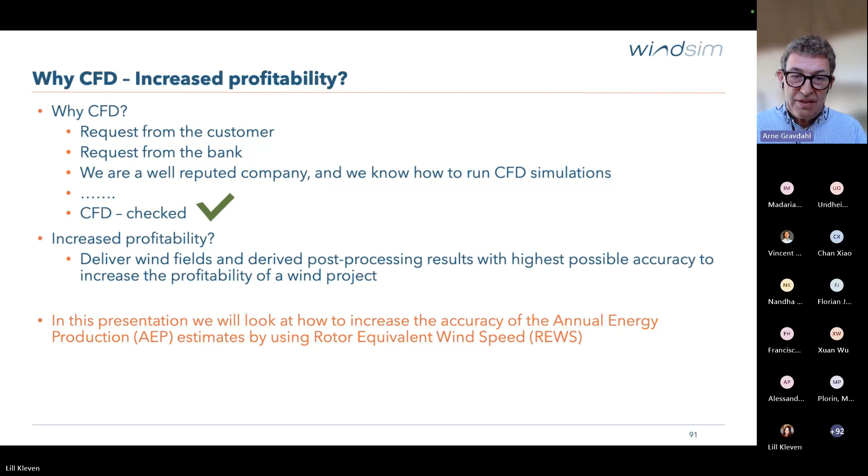But what we would like to do and what we would like to see is that by delivering this, you actually increase the profitability of your wind projects. So that's the purpose of this talk: to see how you can do more proper post-processing to create this increased accuracy, not only stopping at the CFD flow simulation itself. In this presentation, we look at how to increase the accuracy of the AEP through using rotor equivalent wind speeds.

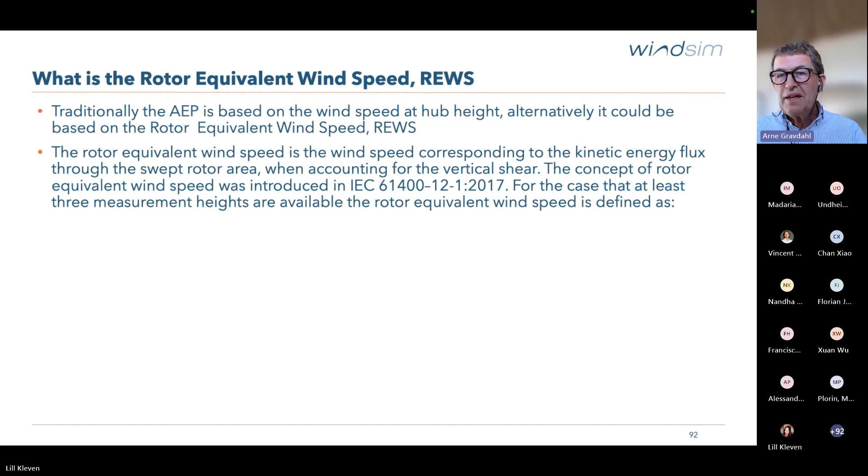So what is a rotor equivalent wind speed? It's much easier to explain with an illustration. You know that when we calculate the annual energy production, it's based on the mean wind speed at hub height. But some years ago, back in 2017, a procedure was introduced in the standard where you could divide the rotor into slots, calculate an average wind speed in each of these slots, and combine it based on the area of that slot. So here is the definition.

By doing this, we take into account the effect of complex terrain, or a terrain where you have a forest, or high stability - basically areas where the profile doesn't really match what you see at the test site where the power curve was established, a flat area. So this is a potential improvement on our annual energy estimates.

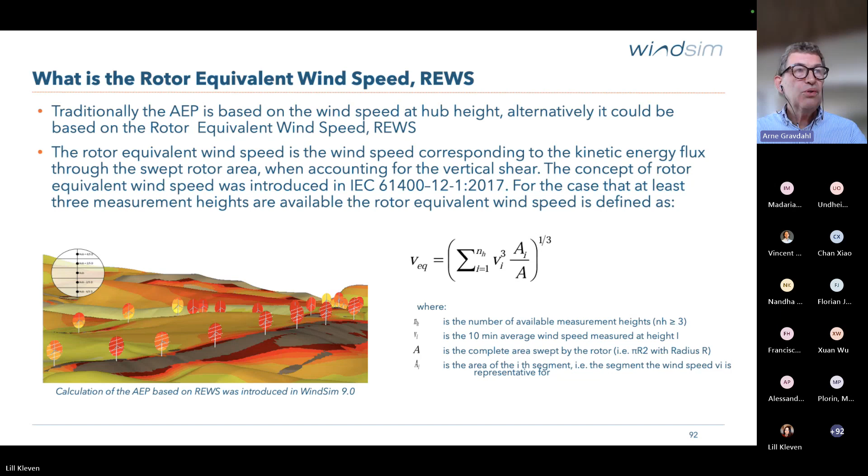How did it start? I attended a tech workshop in the US many years ago, and at that time DNV published a white paper on what is the status today - how good are we at establishing the annual energy production, the pre-construction estimates. They compared many sites with actual production data, and the outcome was not that good. We actually saw an overestimation of the estimated production by almost 10%. This was a great dilemma for the industry.

So of course the whole industry looked at their procedures, and we were aware that there were many areas where we made too optimistic estimates - the measurement campaign, the long-term correlation, the flow modeling, the wake modeling - maybe we were a bit too optimistic. So DNV made better models, more conservative estimates. At least they have an updated version of this white paper, and today they claim that they have very little errors - only a few percent.

If you look at this updated presentation, you'll see the spread—the times you do underestimation and overestimation—is still there, which to me indicates that maybe we only do more conservative estimates, but we haven't really improved too much on our modeling.

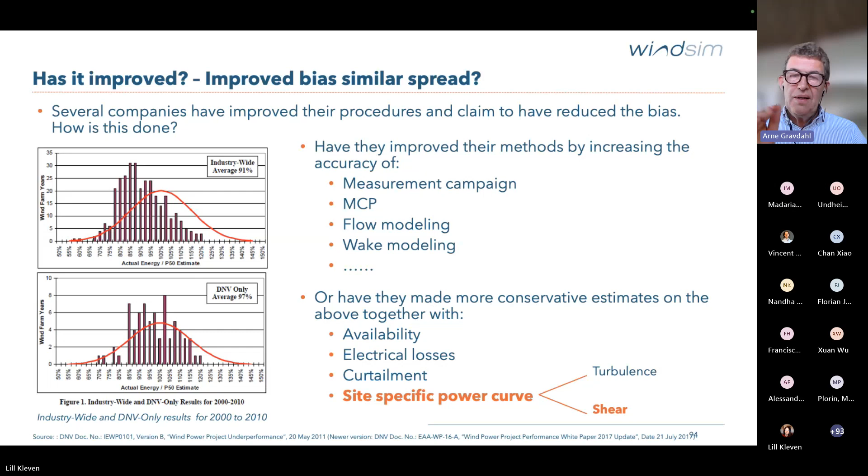One of the main reasons people thought at the time for these too-optimistic estimates was what they called the site-specific power curve. We needed site-specific power curves because if a site has a lot of turbulence, you cannot expect the same production, even though the profile is the same, compared to a site with lower turbulence.

Some turbine manufacturers started giving out power curves for different turbulence levels. We won't look at that, but we will look at sites where we have different shear. This is how it was handled many years ago, and years later it ended up in the standard, allowing you to do the so-called rotor equivalent wind speed.

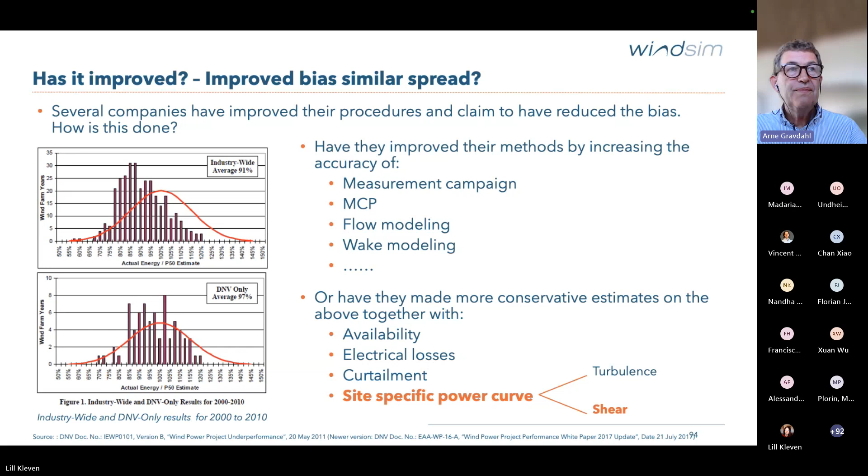We learned about this from a contributor, Francesco Castellani, a professor in Italy. He has attended many user meetings. Unfortunately he's not joining us today, but he showcased this many years ago.

He had sites nearby where he is located, at complex sites, and he observed that there are no log profiles—there are other profiles, including negative shear profiles. So how does it come that they produce the same output? He created an article back in 2005 showcasing that this is actually a big problem.

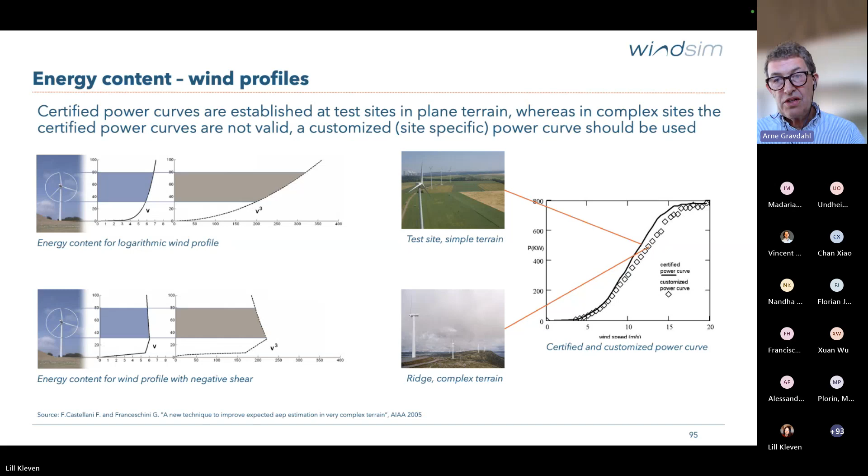To illustrate: you have a power curve obtained at a test site, a flat area in Denmark or Germany, but then on another site where there isn't a log profile, the turbine doesn't follow the power curve established at the test site. So we'll try to deal with that.

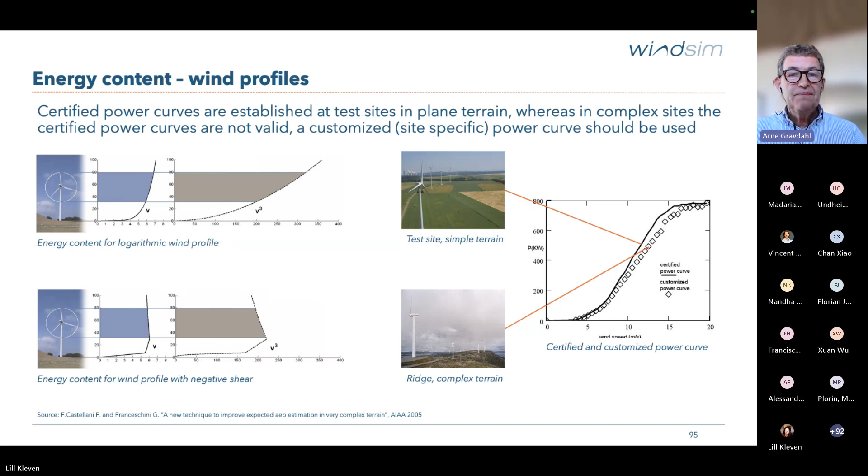When I deal with a problem like this, I like to make a simple model to highlight what is happening, so I make a cosine hill. Here are the dimensions of the model, and also the inclination—it's a rather steep hill, so there will be recirculation.

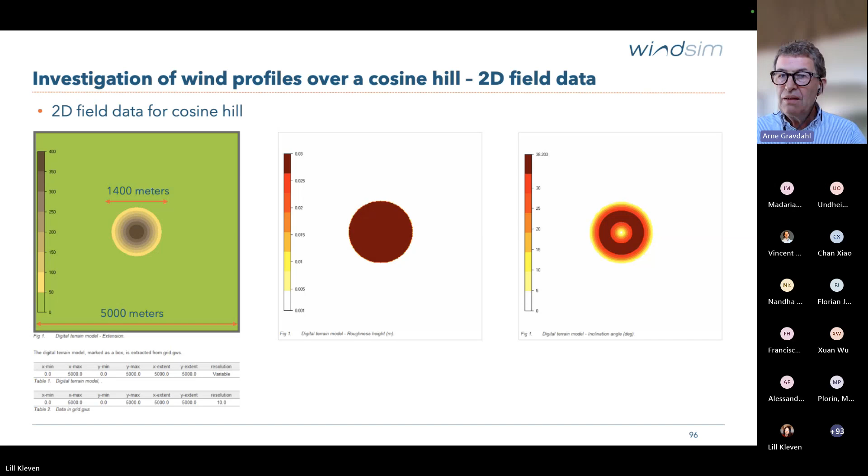This is the numerical model: 1 million cells, down to a 10-meter resolution in the refinement area.

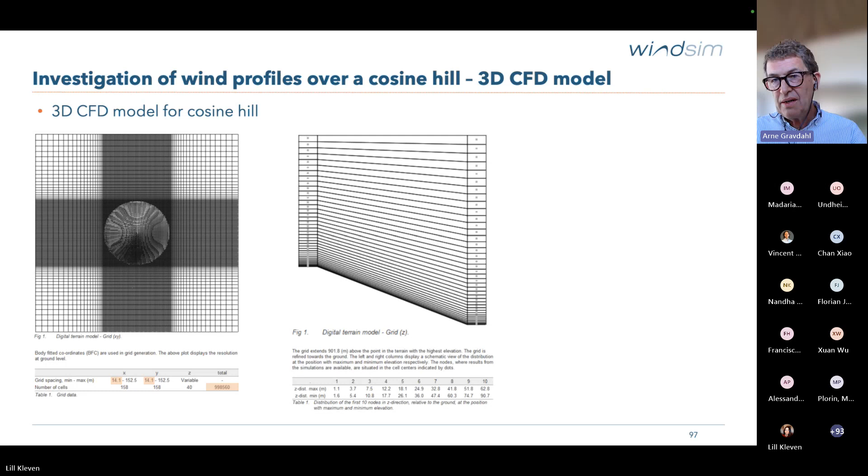I don't bother running all wind directions since this is a symmetric case. I run one wind direction, from 180 degrees, until it converges—it doesn't take long, about 15 minutes. All the other directions I don't care about; I just run them so I can create a report with energy estimates at the end of the WindSim procedure.

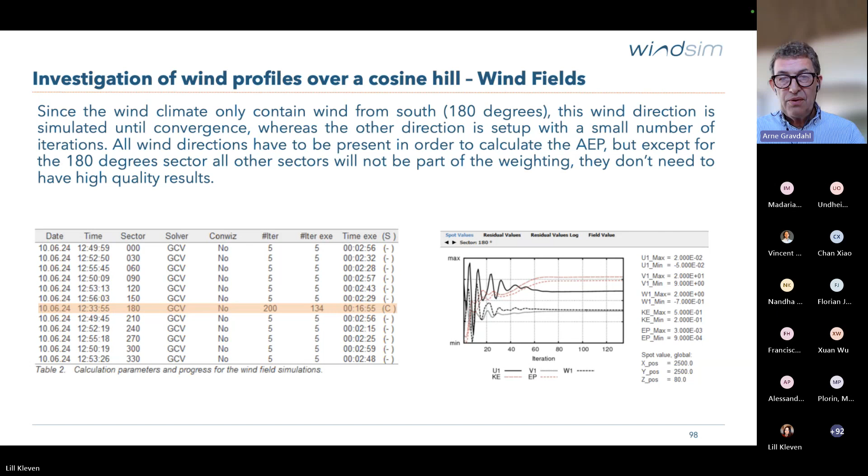On the lee side, if there's recirculation, it's a bit extreme—some turbines are located in the recirculation zone, so I skip those as part of the AEP estimates. The speed would be that low, essentially zero velocity, but it's not realistic to look at production in a recirculation zone.

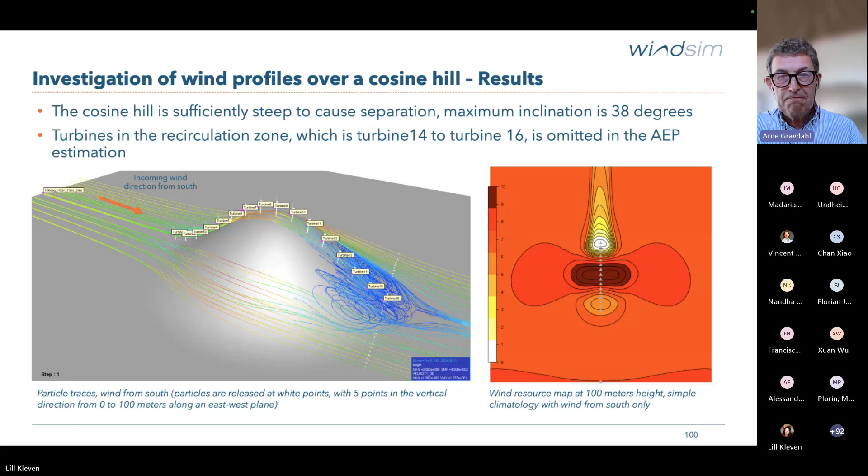Sorry, not the production yet. I've also showcased and highlighted the profiles for some of the turbines. Turbine will show a log-like profile. One more back.

The first turbine, number 1, is in the upper left corner and shows a log profile. Then I take turbine number 4, where the shear changes all the way towards the top. Then I have turbine number 9, which is on the hilltop, where I have a negative shear.

And then I go towards turbine number 13, which is just before the recirculation. It's slightly inside the recirculation, it looks like, and it has an extreme shear.

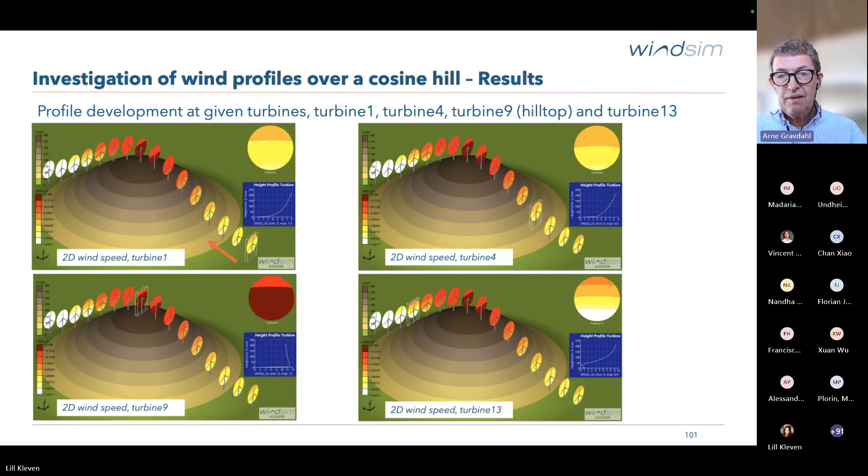In the next slide, we will see all the profiles for the turbines. Turbine number 1 is at the upstream, and then it's 100 meters in between each of those. You see how the profile changes until on the lee side it recirculates.

Remark that here we look at the 2D speed, so it will always give a positive value. So you have a kind of an inflection point towards the last number of turbines. It should have been negative values, but since we look at 2D speed and the absolute value, it doesn't show the recirculation. But you can see this inflection point where the recirculation happens, so it is turbine 16, 15, 14, and slightly 13, which is within the recirculation zone.

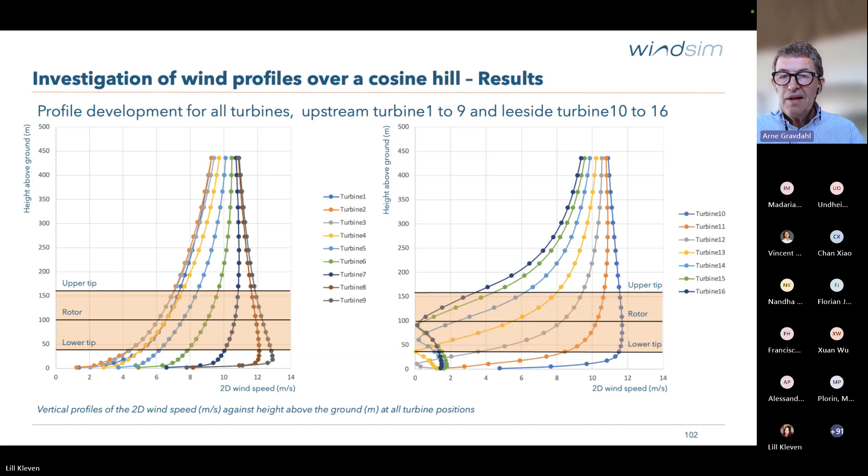Okay, then we will look at the annual energy production. So in the first, I simply create two layouts. One layout, where I specify that I would like to run normally with energy estimated by the speed at hub height. And then I create another layout, where I turn on the rotor equivalent wind speed calculation.

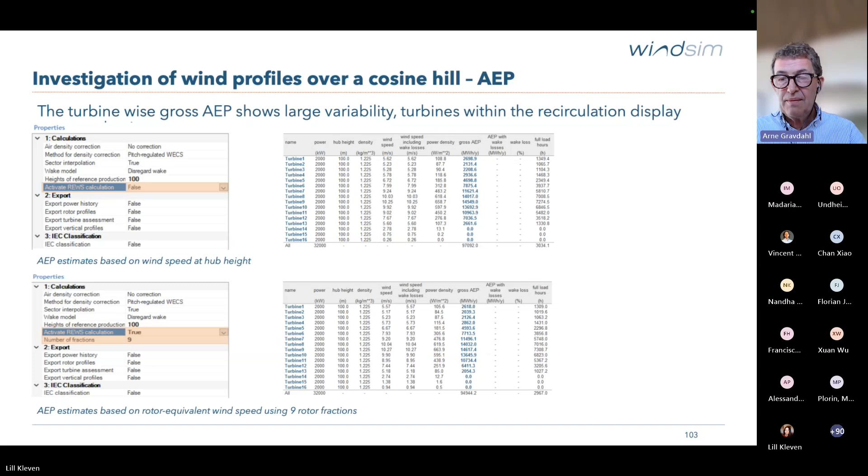So if we go to the next slide, the orange line here is the energy estimate turbine by turbine when you use the hub height. The blue one is the annual energy estimate when you use the rotor equivalent wind speed. What we can observe is that they are quite similar—actually there's a difference of minus 2%. You will get a lower estimate if you use the rotor equivalent wind speed.

Also remark the large variability. The lowest production is at the turbine that is upstream, when the wind slows down before it accelerates over the cosine hill. There's a variation of nearly a factor of 7—6.8 is the difference between the lowest and highest production. Now I disregard the turbines in the recirculation, so they will not be producing in a situation like this. Turbine 14, 15, and 16 don't produce at all because the wind speed is too low at that location.

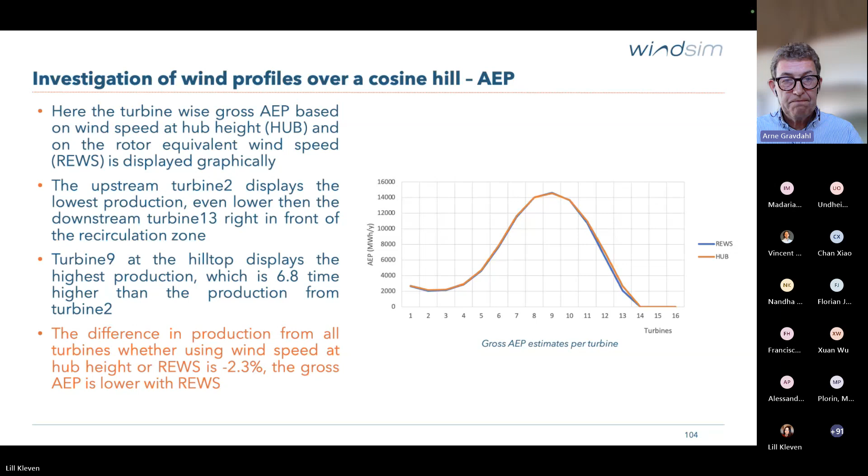So this is the kind of big picture. But if we look at it turbine by turbine, there is a variation for the upstream turbines as the shear gets first higher and higher, and then turns into negative shear. With the highest shears, you have a discrepancy of -2 to 4.5% for the turbines upstream. The turbines at the hilltop will actually have a positive contribution—they'll have a higher AEP when you use the rotor equivalent wind speed. They are the ones with the negative shear.

And then it gets quite extreme towards the lee side, with very high shears there before it separates and you see the recirculation. Then you have a -9.8% difference, and even almost 30% difference, whether you run it with hub height or rotor equivalent wind speed.

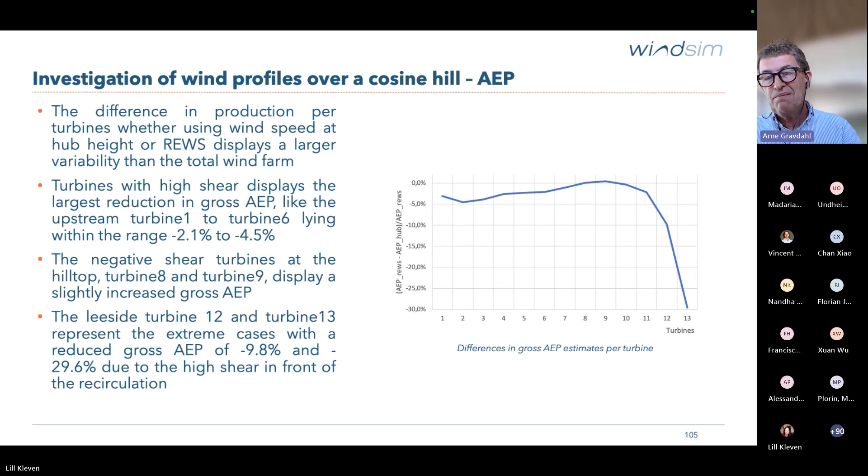Okay, I think there is maybe one or two more. Here is the summary: we have shown that we will hopefully increase the accuracy by using this rotor equivalent wind speed. For my artificial wind farm over the cosine hill, I had a change in production by 2%, a bit more. And the turbines that are the most extreme, with high shear, will show even higher discrepancies between hub height wind speed and rotor equivalent wind speed.

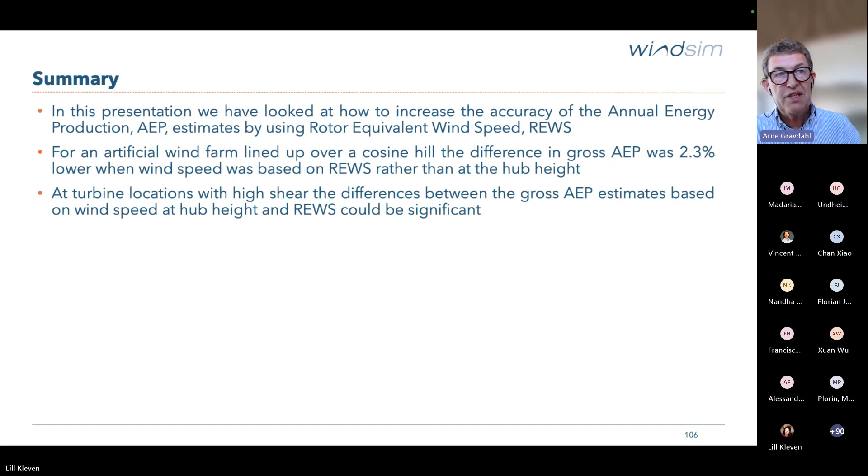Yeah, I think that's what I have on that topic. I guess we'll take some questions afterwards.

The next one is even shorter. It's on time series versus frequency distributions. This is a topic we have showcased in our training sessions for many years, but every now and then, when I discuss with people almost every day, I'm a bit surprised that even really experienced wind analysts are not fully aware of this dilemma.

That we should use time series when we do our post-processing and not frequency distribution. So I've brought up some of the slides, renewed a bit from the training session, and I'd like to highlight this fact here. So if you take me to the next slide, Lill.

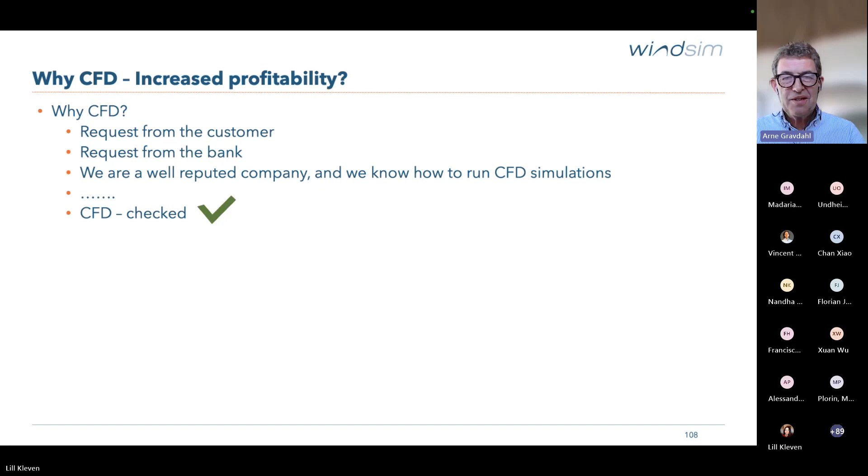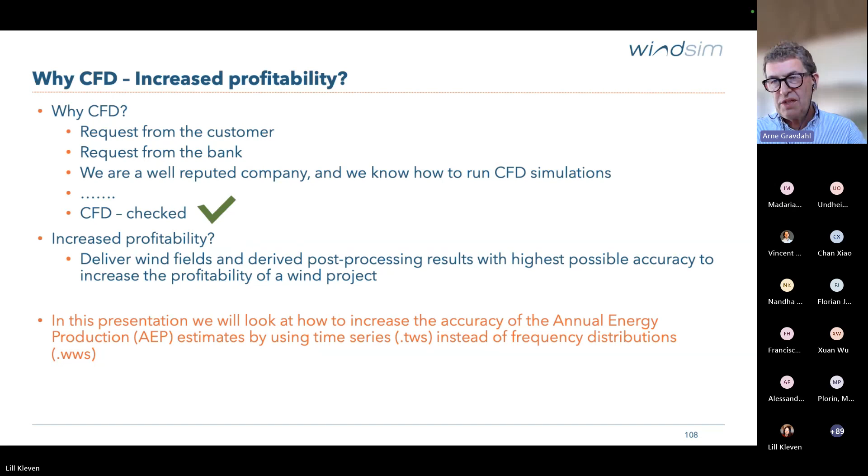Yeah, it's the same question. It's all about accuracy and doing a proper post-processing. So we skip this, it's the same introduction as for the previous one. As I said, in this presentation we will look at how we can increase the accuracy of the AEP estimate by using time series instead of frequency distributions. That's the purpose. Next one.

If we have a frequency distribution, we have a discrete representation of our measurement campaign. We take our time series of measurements, and whenever we find measurements within a certain interval of wind direction or wind speed, we lump it into a single point, which is a point of the frequency distribution. So think of the orange area here: we've taken all the measurements from within the orange area and put them in the center.

And then if we manipulate that—and we always manipulate the measurements in any kind of simulation, taking information from the measurement location and moving it to turbine locations using what we have in the CFD simulation: shift in direction, shift in speed, shift in turbulence—this manipulation we do all the time.

So let's say in a case I have a speed up, I will move something upwards. I have a change in direction, a positive directional shift. I could move this into, say, the blue area and the cross here in the blue area. But that's not allowed—I can't be there because it's not one of the points of my discrete representation. So I have to move it to the existing points in my discrete representation.

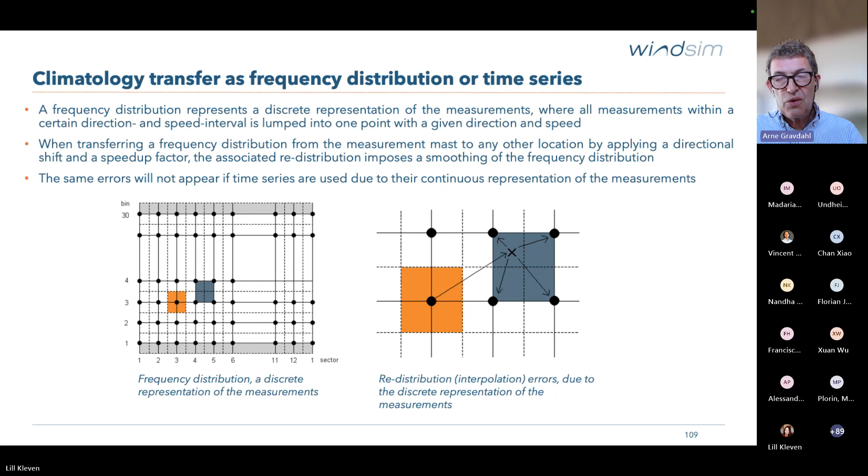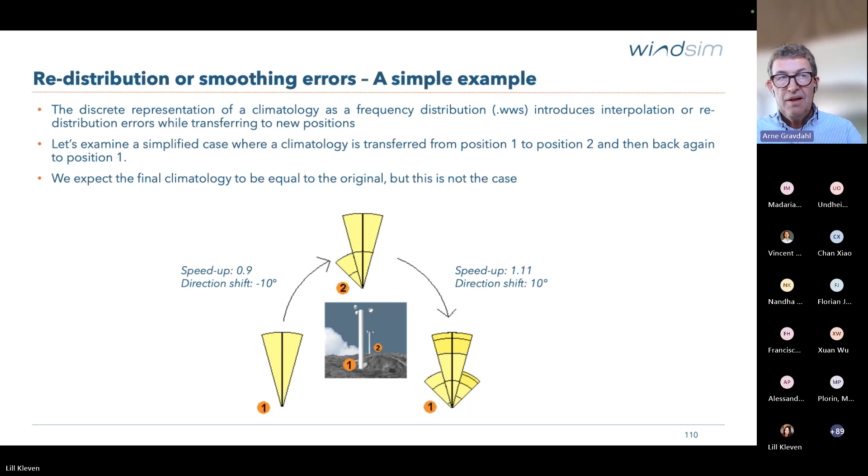Then the question is, how large are these errors in a normal case? So then I bring up our demo case. Next slide, Lill. This is the Hundhammer case. I've put up all the turbines as well, because I'd like to measure the consequences on the annual energy production—how large it actually varies whether I transfer the measurement through a frequency distribution or through a time series.

Of course, I do this all the time—whenever I move it to another turbine position, I apply this. But now I do an artificial exercise: I just move the climate data to another arbitrary location, and then move it back again. I would like to see that it should remain the same.

In order to do this, I of course need a measurement recorded as a time series, and I have one, a 2-year-long time series at this location. I moved it 1 kilometer towards the north, and then moved it back again, using the technique of moving around a time series, but also the technique of moving it as a frequency distribution. I created a frequency distribution version of this time series to do the manipulation. Let's look at how this will look.

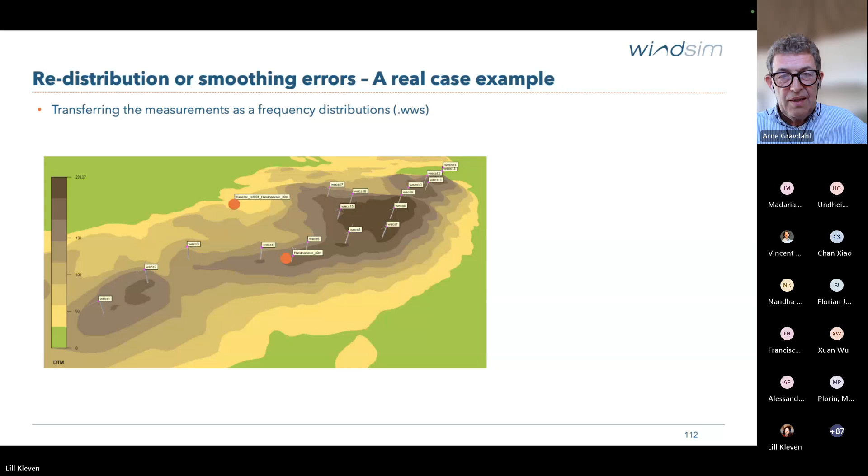So this is the original climatology. It has a certain wind speed, and now I will move it to the northern position. And then it changes, of course, because I'm in another area with other wind conditions.

There were many small steps here. The difference is 4.5% in the annual energy production, whether I use the original or one that I have moved around and degenerated in a way by using a frequency distribution.

Okay, what's happening if I do the same exercise as time series? Again, the original. We move it to the north -- it's another climate up there. And then we move it back, and it looks more similar.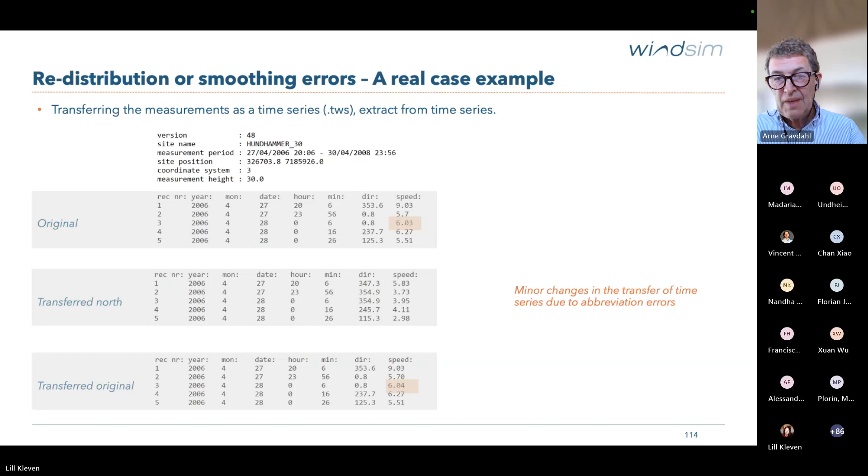So this is the summary: we have shown that transferring climatology as a time series doesn't introduce any redistribution errors. So you should always avoid working with frequency distributions. It's a bit strange, isn't it? Because during all these years, the most used output from WindSim is the frequency distributions, or the wind resource maps of WAsP, where we even have done a Weibull fitting. So I would claim that we have degenerated much of the information we established in the CFD model by going through that path.

Much better if you would like to take WindSim results and move to other tools, use the raw CFD results, as you can do with FlowRes. You have heard that we have this cooperation with windPRO to do this even smoother, or also with openWind. That's a much better approach. But you can, of course, stay in WindSim as well and do it the way we would prefer, and you will have time series with energy production at the end of the road. Okay, thank you.